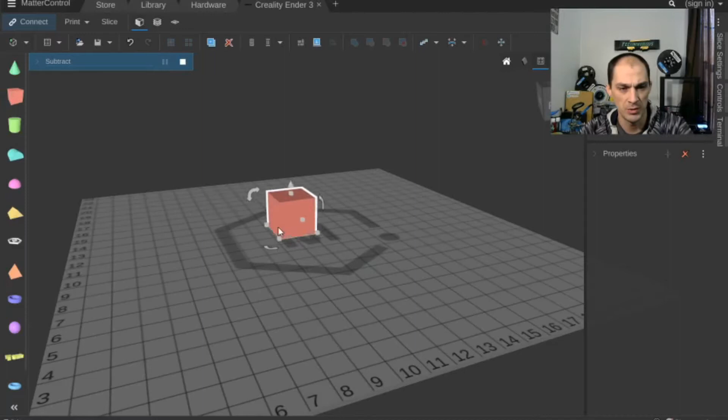One of the things you're going to want to become familiar with is the subtraction feature here. Most slicers have some sort of combination or subtraction feature. This one is just really simple to use. Basically, I have two shapes here.

I'm going to select them both. Once they're both selected, I'm given options up here, and the one I'm going to use is the subtract option. So we'll click on that, and I'm going to go ahead and subtract the cylinder from the cube. We'll hit update, and then you can see when I click out of it, it has removed it and redone our geometry. If I click the square, you can still see it here, so I can manipulate it.

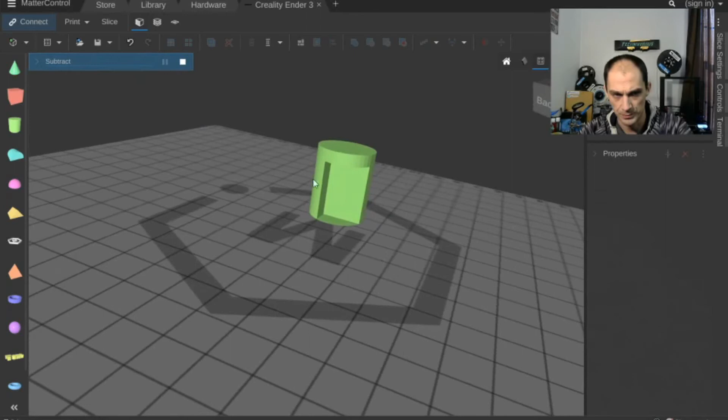And we can actually do it the other way around as well, so that gives us that little opening there. That's a pretty nifty trick. The other options you have here - I'm going to go ahead and get rid of the subtract so I still have two models. Easy to fix.

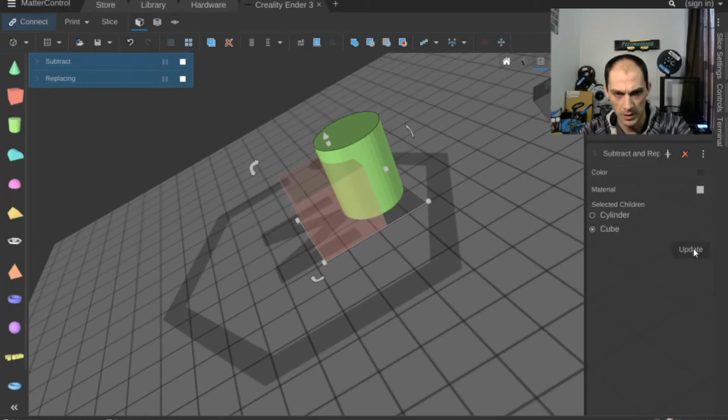A lot like Tinkercad and things like that. So let's try subtract and replace, and hit update. And now I have melded them together. Still two pieces, but part fitting is basically what that's used for.

So we'll go ahead and get that off of there. Select them both again, we can combine them - that's a pretty simple Boolean operation, it just makes one model. In order to undo that, you can either click the X again, or you can hit Control Z. That works as well.

What if we want to take this object and put some text on it? Well, it's fairly easy to do.

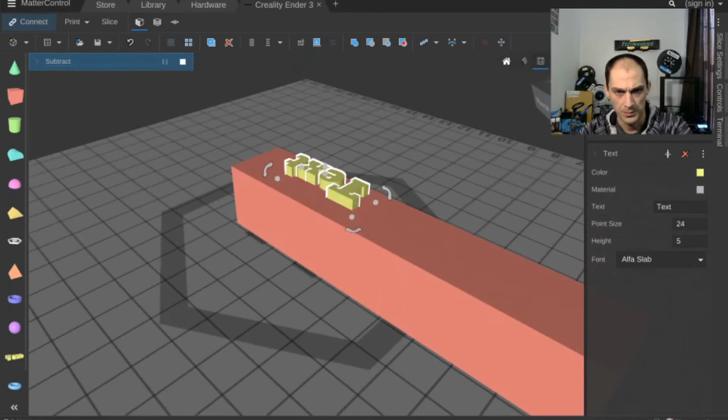We're going to go to the top here. We can select our text. You can change the text input here, or here - excuse me. So I was doing 'Merry Christmas', things like that. The cool thing about this is they have a fair amount of different fonts in here to choose from. That one looks pretty good. In fact, I have a little more room now. I'm going to type that out right.

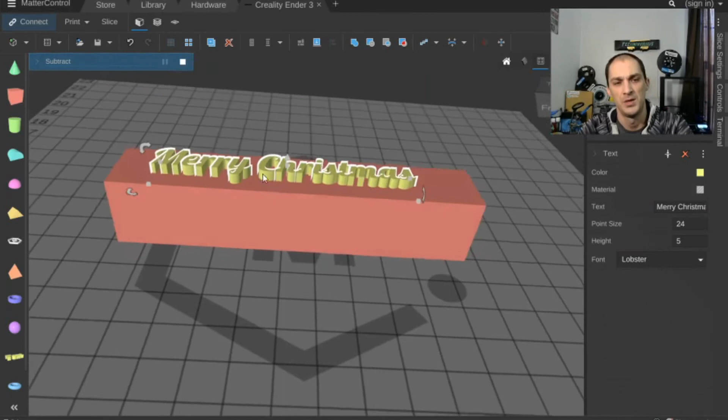And it's that simple. The other cool thing when you're making something like this, or if you're making an ornament or a name tag or something, is that you can again select them both, go to subtract, and subtract the text.

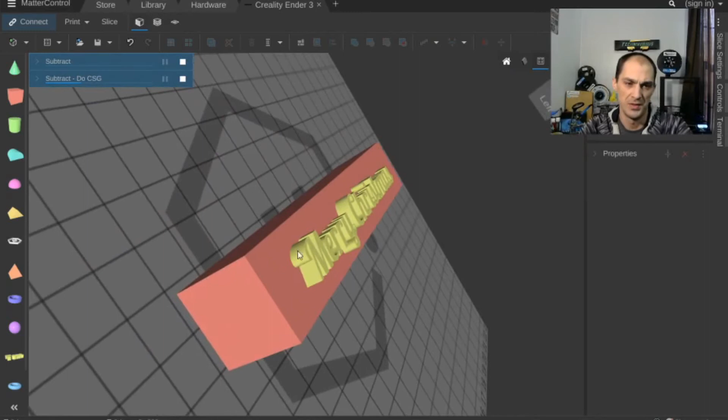And then instead of having it raised up like this, when this bar gets across here, when it's done and complete, it will leave us with the text indented into the material. So that looks pretty cool as well. It's about halfway done, it's going to keep dinking around for a minute. And there we have it - a nice little block that simply says Merry Christmas.

Now, like I said, it's easy enough to undo this. I can undo that, click the text, and I can easily change it again.

And let's see what other fonts they have, just since we're checking it out. Ooh, not bad. That's kind of cool. A lot of different options in here for... Ooh, that's very Christmassy, I should have used that one.

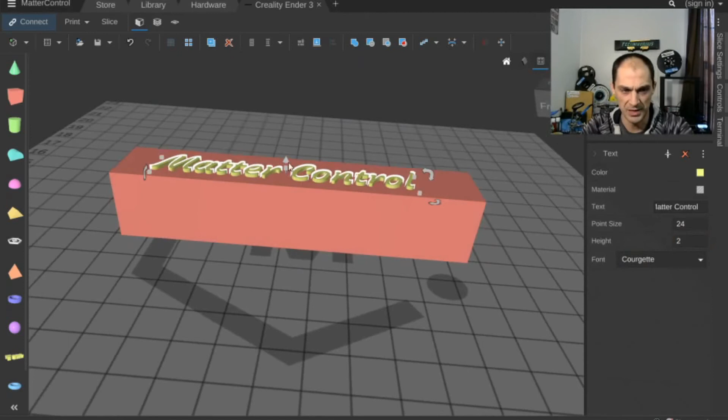That one's not bad. And of course, you can change the height, which is actually how far out the text sticks. So if I go to 2, it is a lot lower. You can use that to dial in how much you sink it into the print or how far you have it stick out. And this is great for doing trophies.

If you have a trophy that you do several copies of and you want to customize them, put names or dates or tournament listings or anything like that. So, and I know we covered this once before, but I'm going to do this one more time here. So basically, this thing here is great for logos - you can put any picture you want in here.

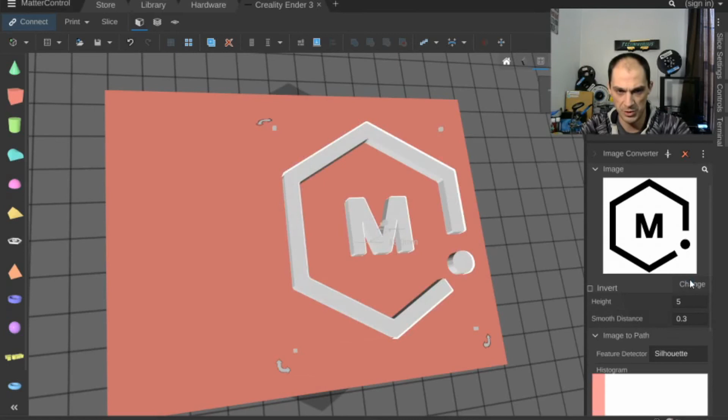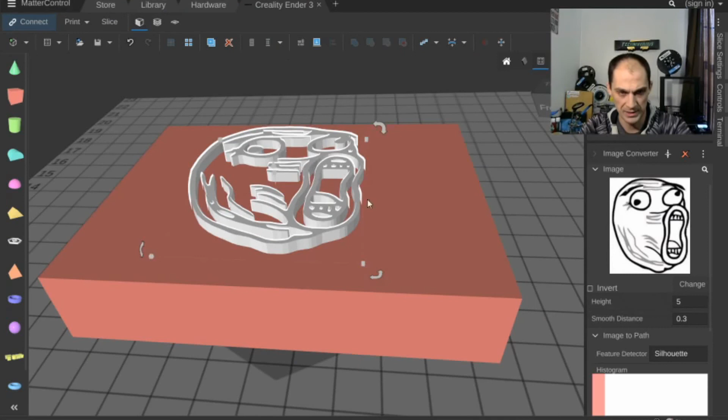And there you go. You could also make this cutout if you want, or you can in fact take it and combine it into one piece. And this is actually a good way to make a stamp.

So now I can print this out, that'll be my top surface. I can dip it in ink and stamp it on other things as well. So a few cool tricks to do with MatterControl.